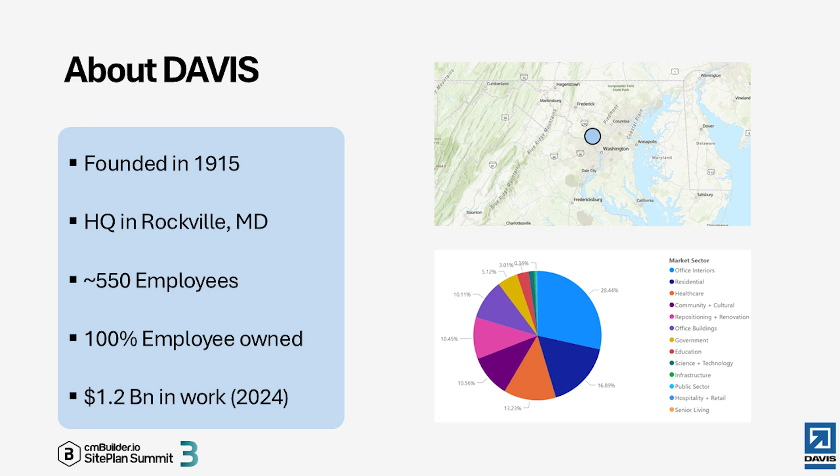So we have a lot of projects in DC and Maryland, and now we're expanding to Philly and Charlotte, North Carolina. We have about 550 employees. It's 100% employee-owned, and we were doing about $1.2 billion of work. We have a couple different markets. We work a lot in residential offices. We're expanding into critical environments such as labs and data centers.

And a little bit about myself. So I'm based in Rockville now. I am originally from New Jersey. I studied construction engineering and management at Virginia Tech, graduated last year, and so I started with Davis about a year ago, and I've been working in cmBuilder for most of that time. Most of my experience previously was in 3D modeling and CAD, and so it's been interesting to pick up the simulation and CAD side of construction.

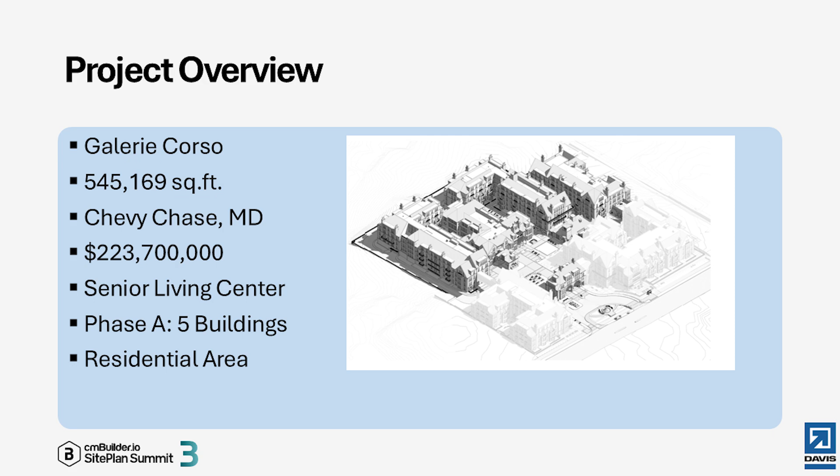So a little bit about the project. The Galerie Corso project is 545,000 square feet, an elder care senior living center in Chevy Chase, Maryland, about a $223 million project. In phase A, which I'll be showing you today, there's 5 buildings. It's in a residential area, so we're trying to be cognizant of the surrounding citizens and mitigating dust and other pollutants.

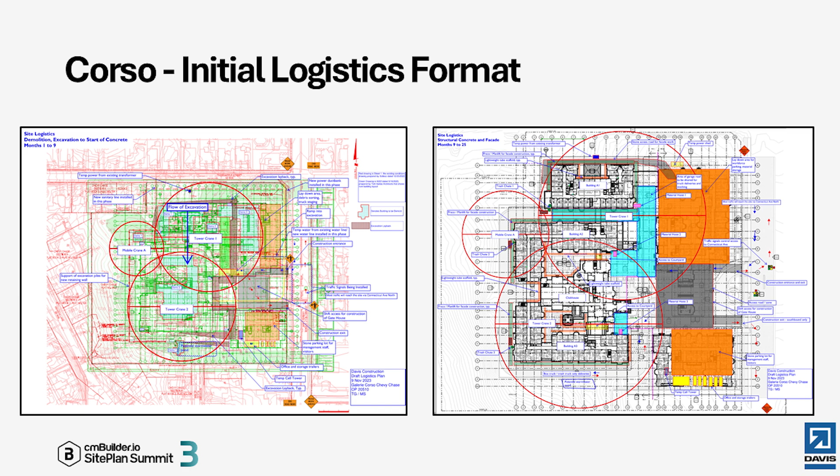So this is the mess that came to my desk when I first started this project. A lot of the time you'll find people who are focused on just their specific task are not really thinking about formatting information in a way that's able to convey. And so my job has always been, how do I bring your ideas from your head to the 3D model? With this really congested plan they gave me, I had to do a little bit of diving through the plans, discussing with people, and picking their brains about what they really wanted to execute, because we can't bring this into a proposal, and that's where cmBuilder steps in.

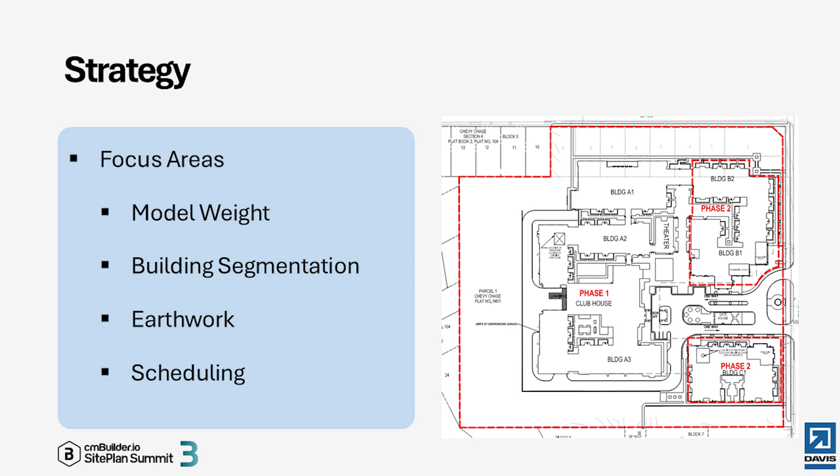So we have 2 phases. In phase 1, we're building 5 different buildings, and the model was submitted as one large Revit file, about 2 gigabytes. A large part of my approach was, how do I split the model up and make it lightweight enough for cmBuilder, so that the simulation will flow smoothly. Another part is that there's a very large site, so earthwork was a very large consideration. All the different excavations and initial terrain data was very important for the QTO aspect of this project. This is all important information for the estimate.

And the other most critical part is the scheduling. We're going to be working on multiple zones at the same time, so breaking the model out so that we could show that schedule and bring everything in was a very big focus for me. We were given a P6 schedule, and we were able to import all of our milestones. But you'll see further on, there's about 120 milestones that we had to put together to show each of these individual phases coming through.

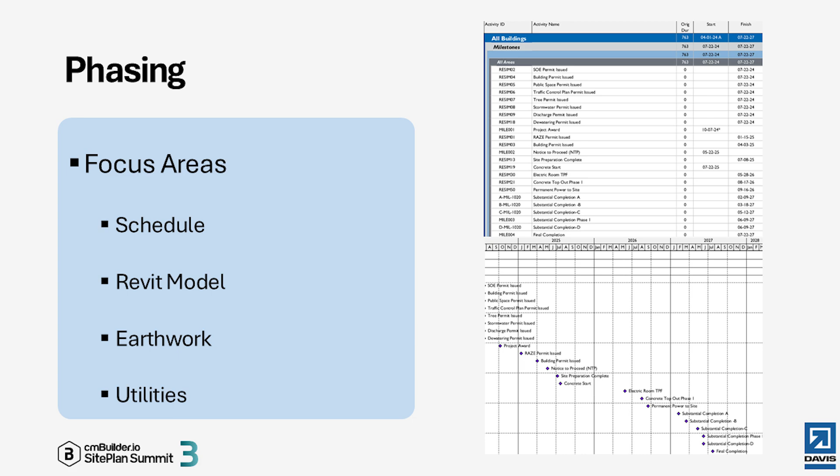Now, in the original request given to me, the owner wanted to see the progress on the project in 3-month jumps. So to show all of that data, I wanted to break it out as granular as I could and then show at a specific milestone the progress as I came through. It was really important for me to dive into the schedule, break down when one zone was being worked on versus another, and bring all of that information in through the milestones.

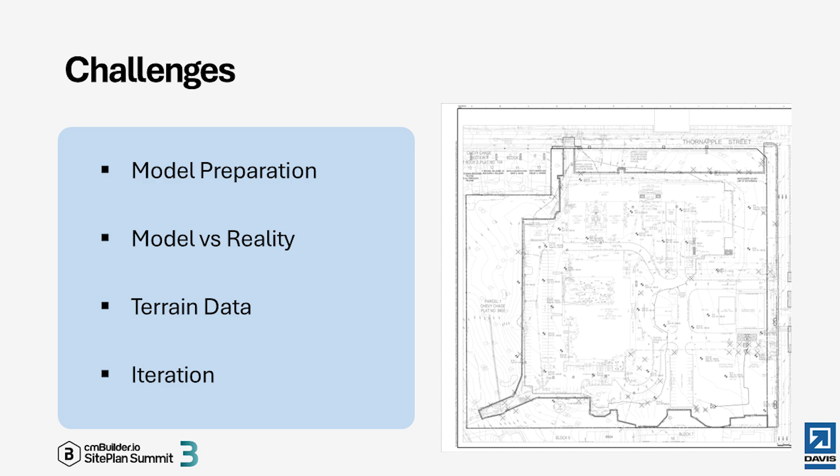One of the challenges I had was I had to prepare the model not only from the Revit standpoint, but also the initial surroundings. I was bringing in civil drawings to use the contour lines and the custom terrain in cmBuilder to have accurate terrain and topography, so our calculations would be correct as we do our QTO.

And so a really important factor for me was, what is the difference between the model versus the reality? And I want to bring my model as close to reality as possible. We don't want to show things that are unrealistic, and it all serves to produce a better logistics plan overall.

But another important thing with this is that I had to iterate on that design. And so there were a lot of things that I didn't know specifically about construction when I came into the job. And so when I initially started on this project, maybe 9 months ago, there were a lot of questions that I had that were unanswered. And as I went through, people reviewed the slides, gave feedback, and I was able to make more accurate updates so that we could align the model with reality.

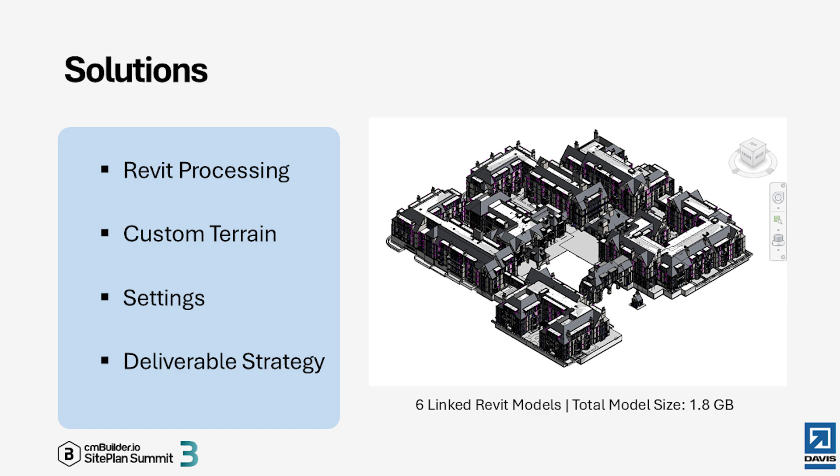And so this is what the Revit model looked like. It had 6 linked Revit models within it. It's about 1.8 gigabytes. And so a big portion for me was, how do I prep my Revit model so that it's lightweight enough for cmBuilder, but also showing the great depth of information that's here. The designers put a great amount of work into it, and it looks very nice.

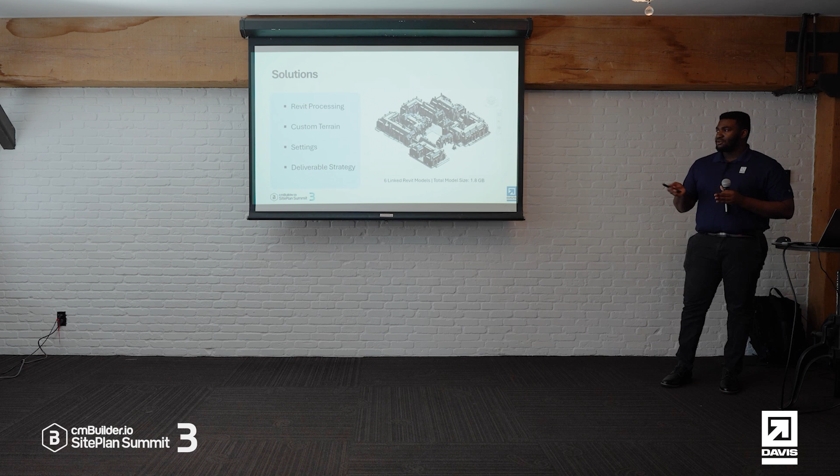And so a big part for me was removing all these superfluous things, the things on the inside that we don't really need to see. It included all the MEP, all the fixtures, all the important things, but that's all not really needed for the purposes of our presentation. And so reducing this model down to structure and architecture was a really big part for me, but part of the problem was the entire site has a continuous slab, and they didn't break it out nicely for each building to have its own structure or own separate layers.

So a big portion for me was selecting certain portions of the model, exporting that either as an IFC or as a separate Revit file, and bringing that into my cmBuilder scenario so I'd be able to work with it more quickly. Another part as well was the settings, right? We want to make sure that it's rich, but it's not too heavy.

And also, it was important for me to think about, what was my deliverable strategy going to look like? What are they actually trying to see? Are they trying to see the progress of the structure so they can communicate with their team in real time, or are they just trying to see how long is it going to take practically for us to get people into this building?

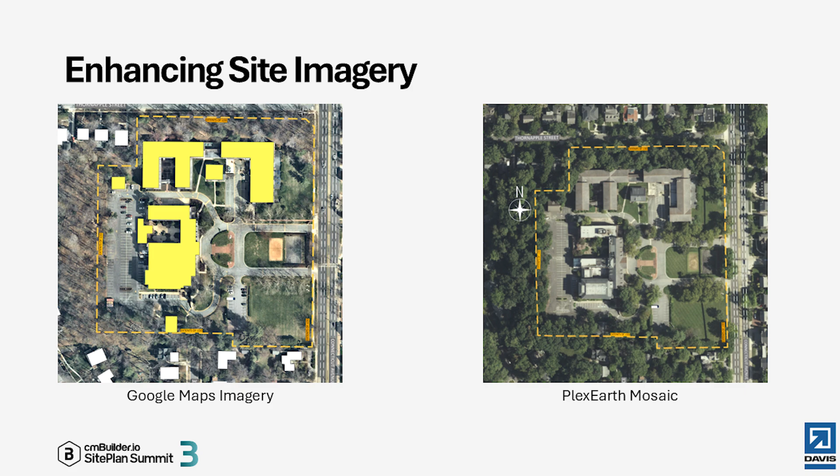And so a couple of different strategies we employed to enhance the general site imagery. The initial imagery was a little bit out of season for what the owner wanted to show, and so we used a tool called PlexEarth. This would bring in some more refined Google Maps imagery and create a mosaic around the site, and so we can see a little bit more high-res imagery at a specific time of year.

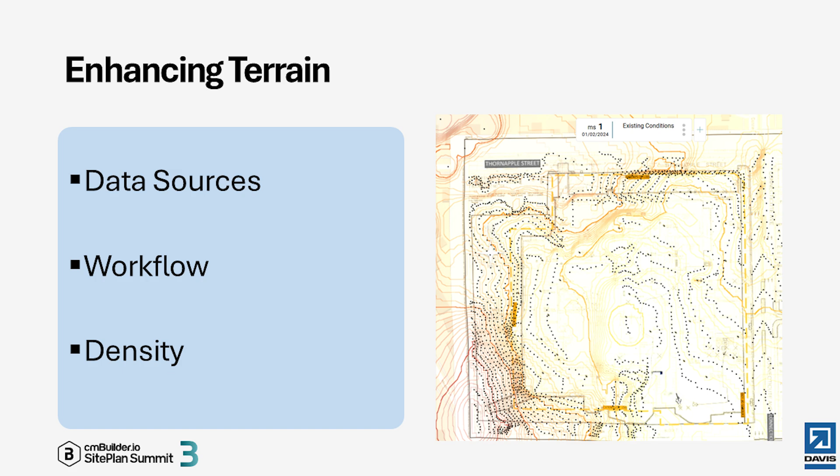In addition, the topography that I brought in from the civil plan, I manually placed all these points. I've now learned you don't need that many points to get the message across, but it was a very important thing for me to see practically what my site looks like, because the initial terrain data, while it's helpful to get a basis, it really matters what the use case is for your project. And so for us, QTO was a big factor, and we wanted to make sure that that made sense.

And so overall, I brought my civil drawing in, projected it onto the terrain, and started placing my points along those contour lines as I saw fit. You can see a very dense area there on the west side of the site, but overall it slopes from the top to the northeast to the southwest.

And so I'll start now the simulation. Oh, excuse me.

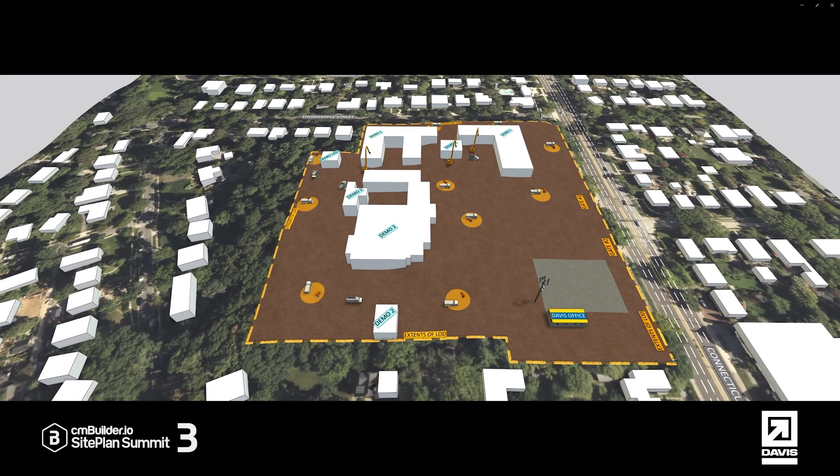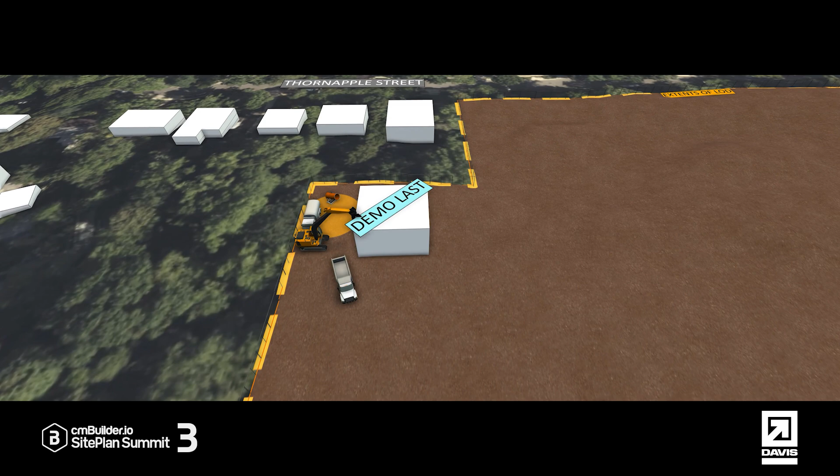Okay, very good. So you can see we're nested within a neighborhood here. We have a main road on the east side of the site here. The first phase was the demolition of a couple existing buildings. So we go through here with a couple dust suppression systems, breaking down the buildings, doing abatement inside the buildings, and so on. And then we start working on our mobilization in phase A.

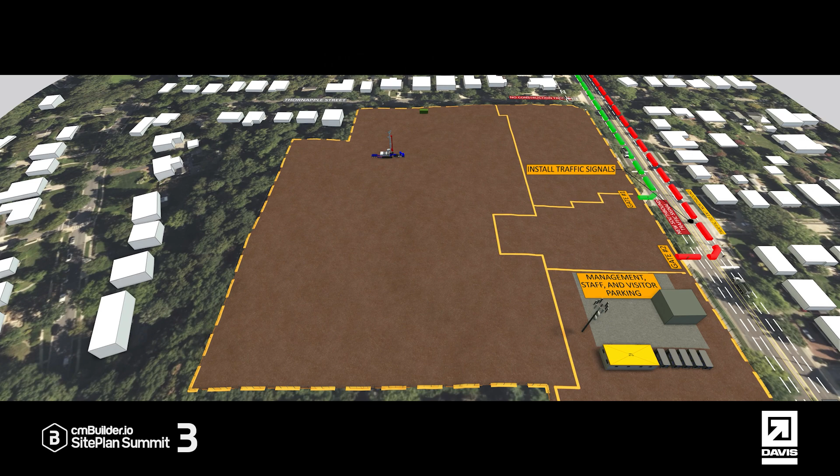And so here, we're preparing to do the support of excavation on the west side of the site. And so as we continue down to the south, we start preparing our earthwork in the north side of the site. And so we continue on installing utilities, and we start here with our slab on grade. And so this is a really big site. We have an entire building sitting on top of a garage deck combined under all the buildings.

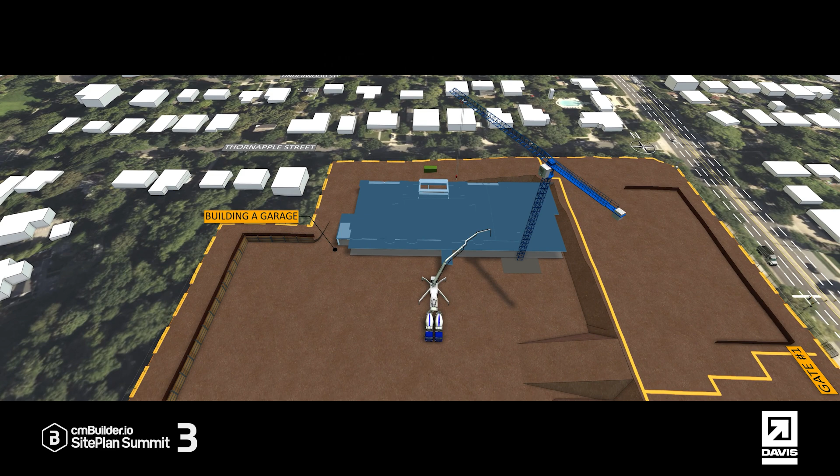And so we're working on different segments of the project at the same time. And so as you'll see structure coming up, you'll see structure coming up on a further segment in the south of the site. And so by the time we're at level 2 here, we're working on the slab on grade for building C and D.

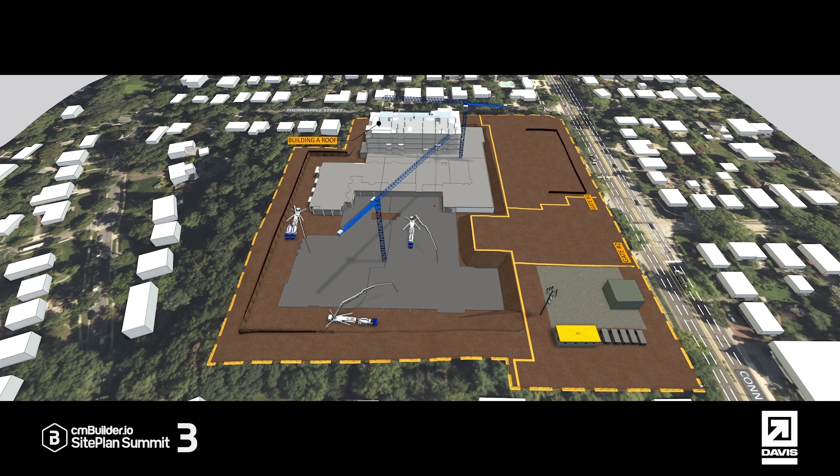And so you'll see as well that we have 2 tower cranes. We're planning to bring mechanical equipment in on the east side of the site. And it was a very important part of our design to pick a crane that was large enough and capable enough to pick across different areas of the site.

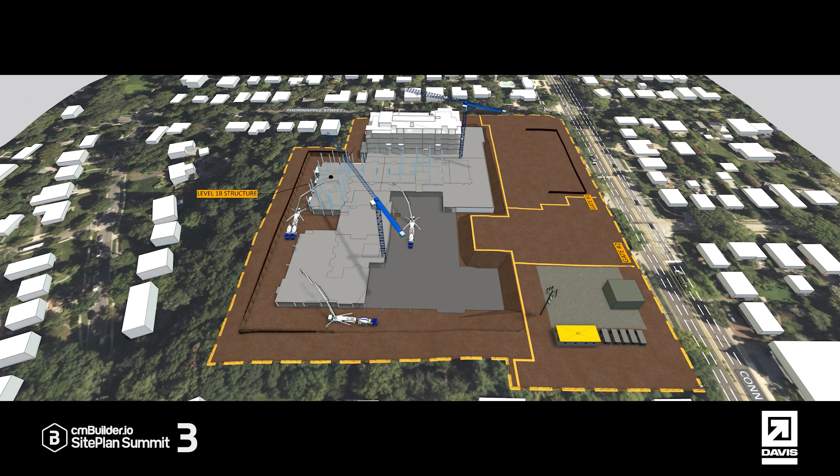And so here we're looking at building A as its structure is almost complete. Continuing on now to the remainder of the south side of the site, working on building B and C. One thing that I would say is a lesson learned here, the initial Revit model had no breaks for the columns, and so if I was to do this again, I might export it as an IFC and split the columns by level so that I could have my layers properly.

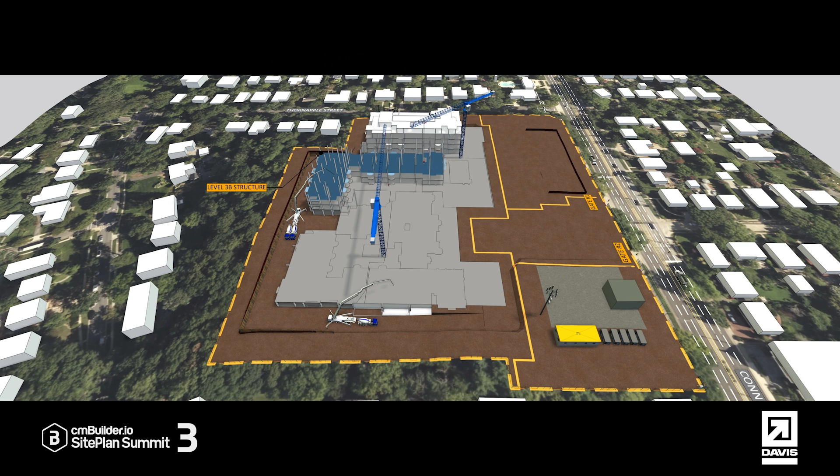But a big component of this project was it was handed to me after an initial version was already released. So my boss about a year ago worked on this project and put an initial version out. And so when I first came in, I tried to do as much as I could building off of what he had, not trying to reinvent the wheel. But I found that when I was preparing for this summit, it was better to start from scratch. And knowing when to start again and reiterate on the initial intention is very important for me.

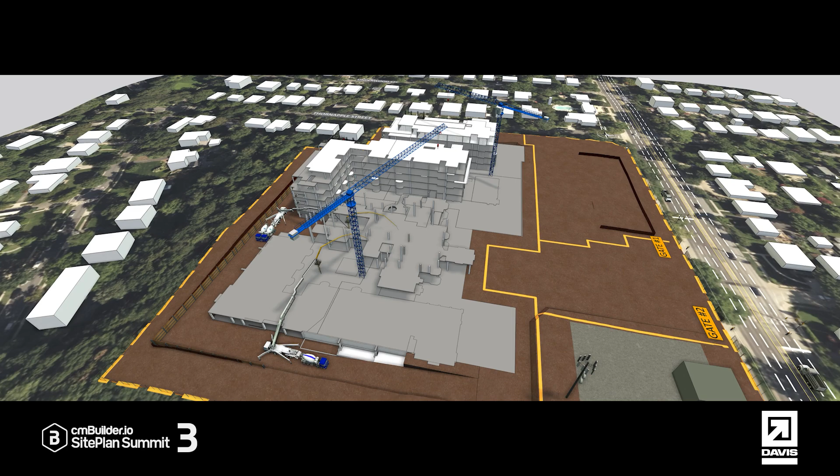And so as we continue now building the rest of the structure, you can see building B is now complete and we're working on the clubhouse at building C here. And you can also see, it's a little bit difficult to see, but the wall frame is also coming up. And so these are all important details that were given to me in the schedule, things that our field team wanted to know about. And so overall, we wanted to be able to communicate with both the community at large and with our team internally.

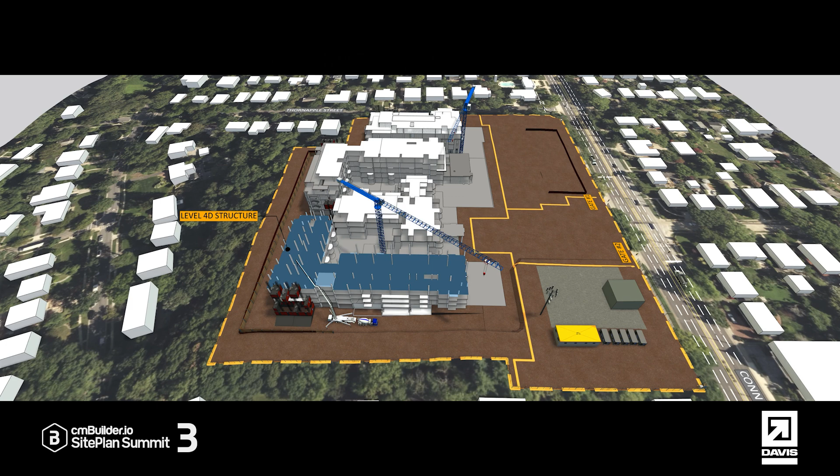Part of the request was that the county wanted to share this presentation with the surrounding neighborhood so they would know practically what does it look like, how much disruption is there going to be in my day-to-day life, and what are you doing to mitigate that disruption. So we're continuing on with the remainder of construction in the south here, almost done with the structure on building D, and building C is just about complete here.

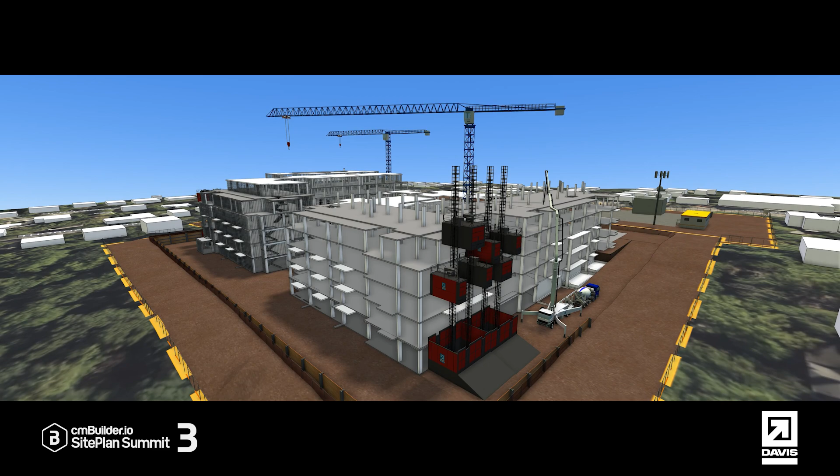You'll see in a few moments the trucks coming in to align with the crane and allow the mechanical equipment to be prepared on the roof. This is a really big lift. This whole project has a lot of moving parts, and it was really important for me as well to pass this information on to the safety team so they could start preparing where to place equipment, evacuation plans, and we'll go into a little bit more detail later about other ways Davis is using this technology to share that information.

And so we'll continue on here, finishing out the remainder of the structure on building D. There's some work going on the insides here in terms of structure. You'll see the pick here for the mechanical equipment. And so now we start getting to do facade on the building in the north. So as we're finishing up wall framing on the south building, we're finishing up architecture on the north side.

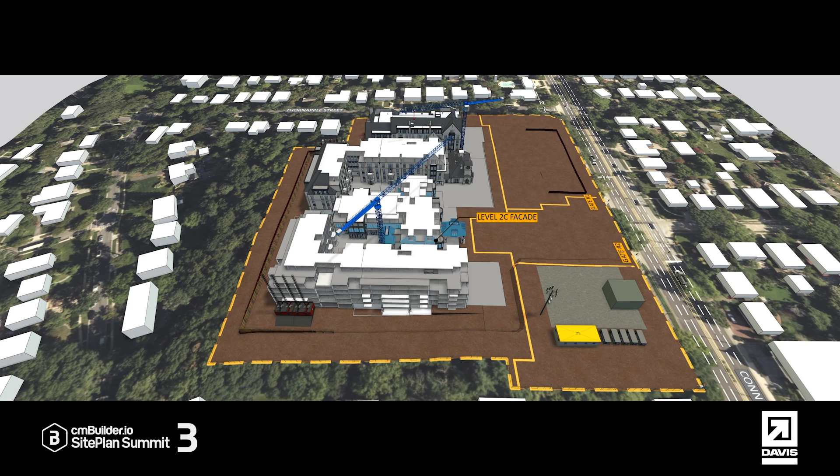And at this phase in the project, they're planning to have some level of material laid down either within the structure or underneath in the garage. And so sorting out the logistics of that was not fully fleshed out by the time I got to make this presentation. And so this was really a facilitator for the discussion. These models have been really important for taking it into a meeting with people who maybe are not so technical but bring a wealth of construction knowledge so they can see practically, yeah, that doesn't quite look right. What can we do about making this look more realistic or more feasible?

And so as the remainder of the facade comes up on building B, we'll finish up building C now, and we're starting to work to close in the remainder of building D here. So there's really a lot that went into putting this model together. It was a lot of getting my camera in just the right angle, selecting a certain part of the model, and making sure it aligned with a milestone. And that required a lot of back and forth in terms of testing, making sure it looked correct. And I think a big portion of that was due to the way the Revit model was structured.

We can't always control the inputs, but what we can do is make it work with what we have. And so not being able to use the object tree was one of the challenges that we faced here. And so I was able to kind of maneuver around that by working on selection, temporarily hiding objects, and making sure I'm seeing exactly what I want to see.

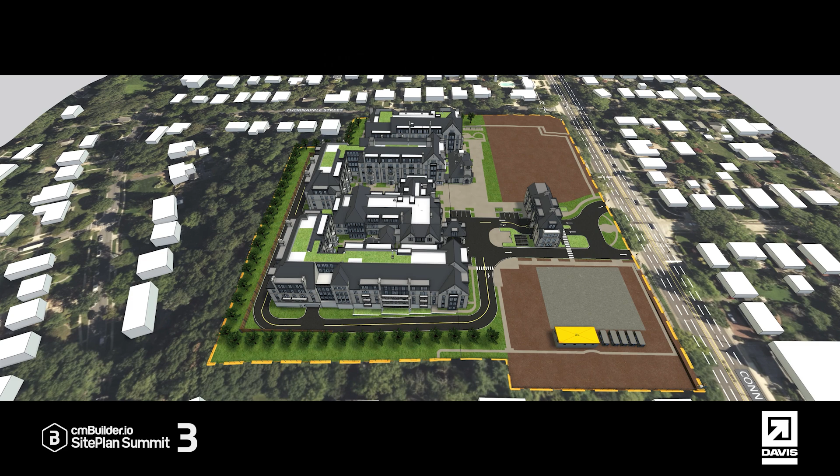And so by the end of the simulation, now we have all of our hardscape and landscape. And so all of our buildings are now complete. We have a theater, gatehouse, clubhouse. And overall, this was a really heavy lift. But over the span of maybe 2 or 3 weeks, I was able to put it together. But this was largely an independent project.

And so for me, it was really important to communicate early and often about getting feedback. What are the things that you're looking for specifically in this project? Who's the end audience, right? Who are we building this for? And so this was all really important information that we wanted to pass along to the county. And it was a really great experience to learn about the intricacies of cmBuilder.

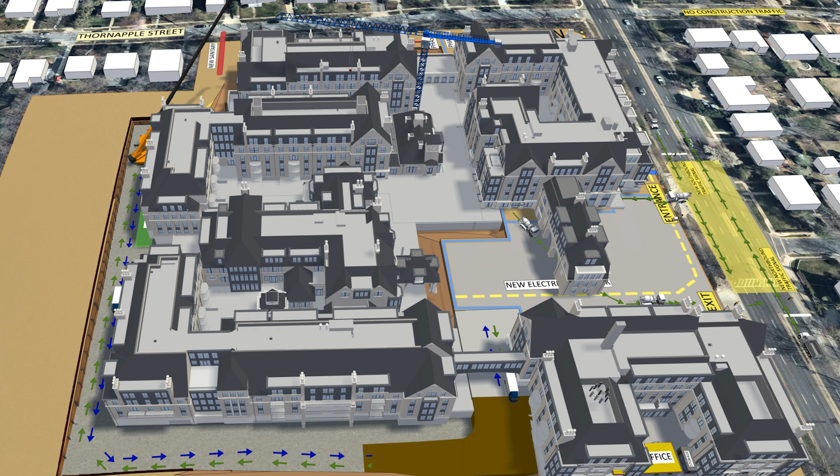So some of my lessons learned, right? Know your audience. This first presentation that was provided by my boss here was sufficient for the time, but overall visually it left something to be desired. And so I took that as a main component for me. I wanted to make sure that it was visually pleasing, cohesive in terms of color and style.

And so largely at Davis, I've been responsible for establishing those standards, and I tried to pull out all the stops and make sure that this presentation was an example of what we can do on the high end at Davis. And so the other part of preparing my model was segmenting it, right? Understanding that it's a big lift, and so you have to break it down into steps that are workable, otherwise it ends up getting overwhelming.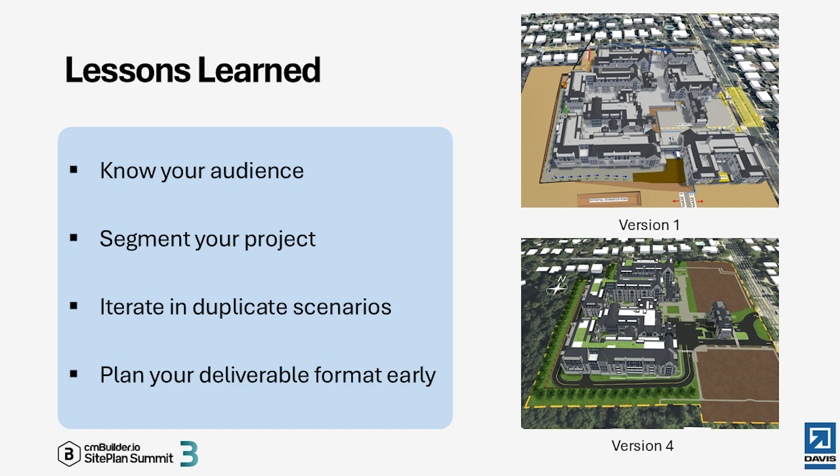So another big portion of this is that I iterated in different scenarios. So my first model, the model I had provided by my boss, wasn't useful. So I made a second version, a third version, and then finally one that had all of the scheduling information fully included. But the original request was to have milestones and 3-month jumps. So it was very helpful to be able to duplicate, build on top of what I already had.

And then a really important thing for me was planning my deliverable format. Are they asking for images? Are they asking for a video? Do they want to be able to fly around? These are all important things, because if you have little blemishes in your model, you don't want to give anybody ammunition. You don't want them to say, well, this looks wrong. I don't think you guys are thinking the whole project through. And so it's really important context to know when you're starting your project.

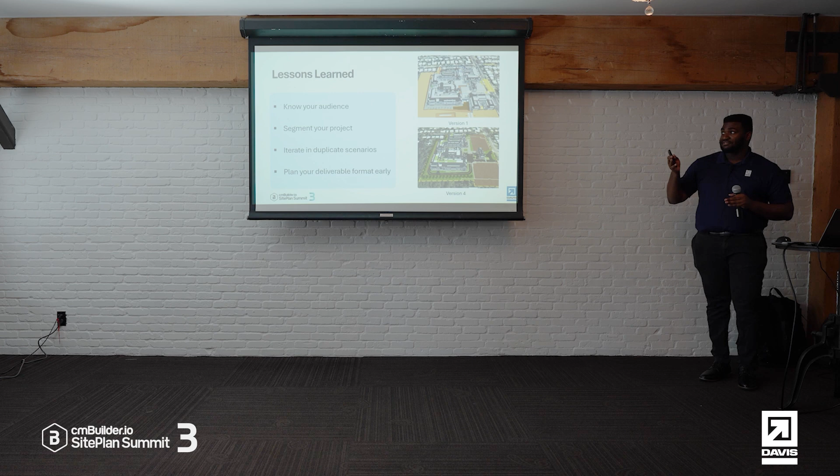And so for me, I knew that I was going to have to share this presentation with the county, and wanted to make sure that this was presentable enough for everybody to see the full vision that Davis had for the project.

Another use case that we have for cmBuilder at Davis is structural planning. So this was a recent project that we won. A big focus for them was, how do we demo this existing building and build a support structure within it, while the demo is still going on.

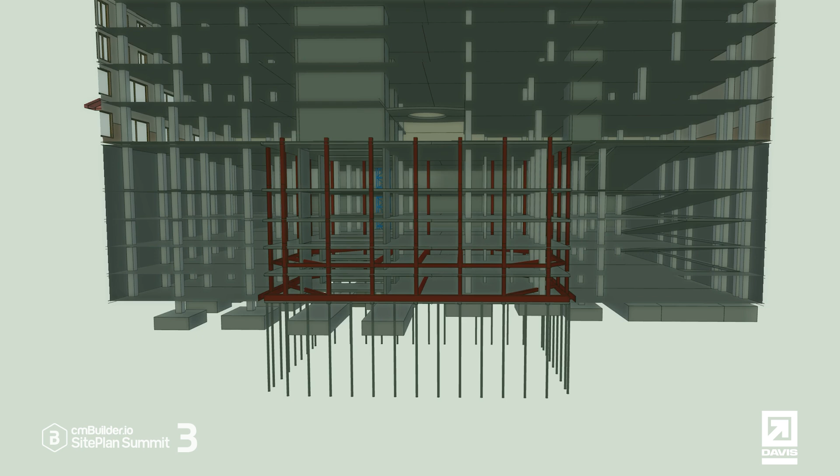And so the plan that was proposed to me: how can we shimmy steel beams in and put our piles in, in order to save schedule time, build the structure for the new building, while also saving money and enabling crews to work simultaneously. And so a big part of us winning this job was showing our intent, working with the structural engineers and communicating their intent. And so there were about 3 or 4 different iterations of this structural plan.

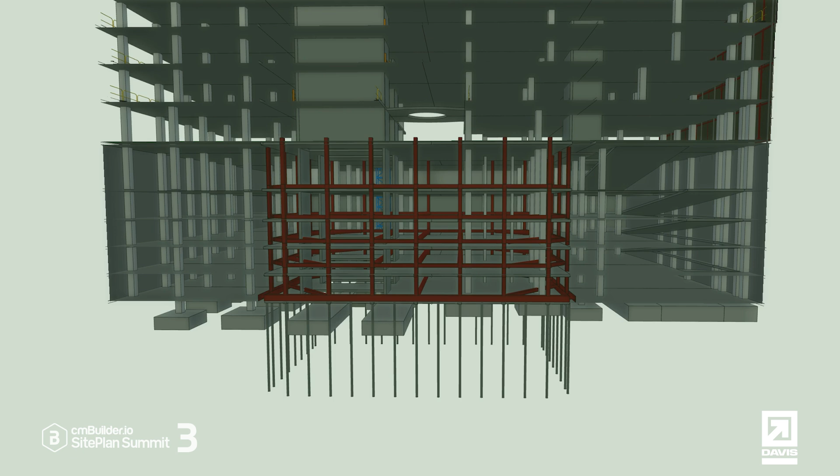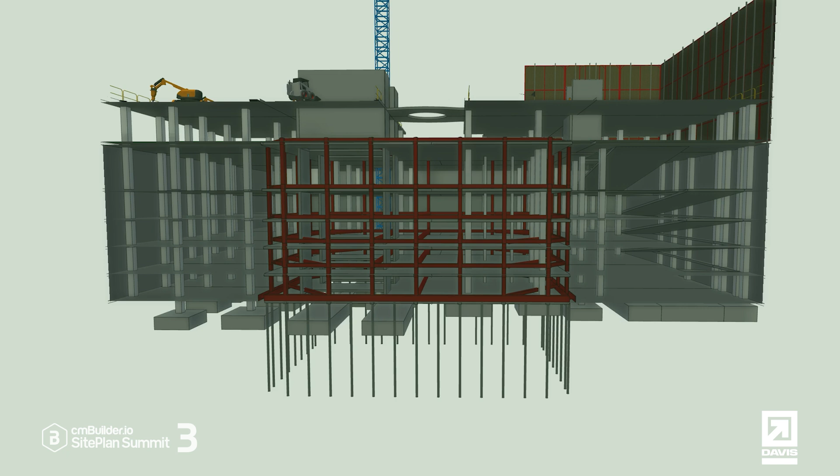But overall, our plan was to cut holes in the slab, slide steel in with a chain lift, and allow the structure to come down while the remainder of the support structure is coming up through the garage level. So this is a 15-floor building being built next to a hotel. And so being able to not disrupt the surrounding area for too long was a very important piece of this project as well. And so you'll see that by the time the building demos down to level 2, our support steel is already ready, and the rest of the building can go on as planned.

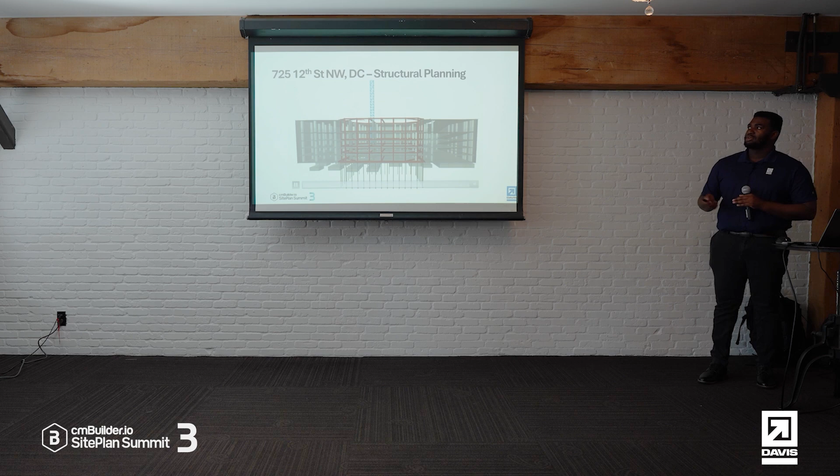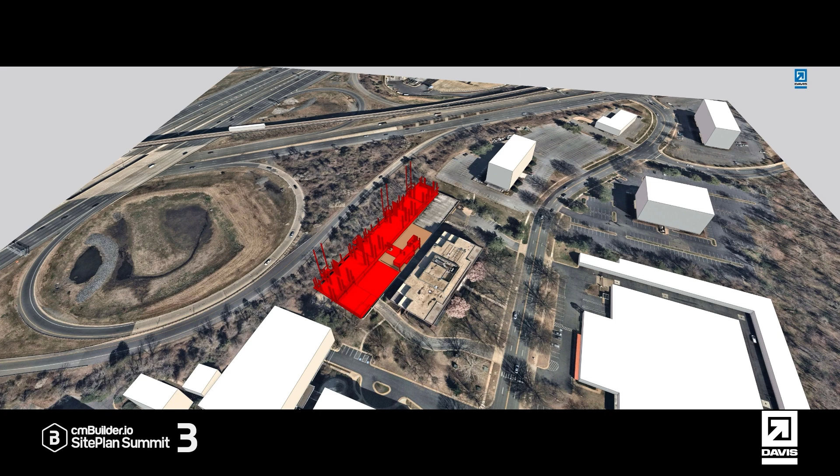Another use case that we have was for our scheduling. We wanted to communicate our pour dates with a team on a very large project, and the language barrier was a very important part of the project team. They wanted to be able to communicate with the teams pouring concrete, but wanted to do it in a visual format. And so for me, I took that challenge and decided it'd be a good format to color code.

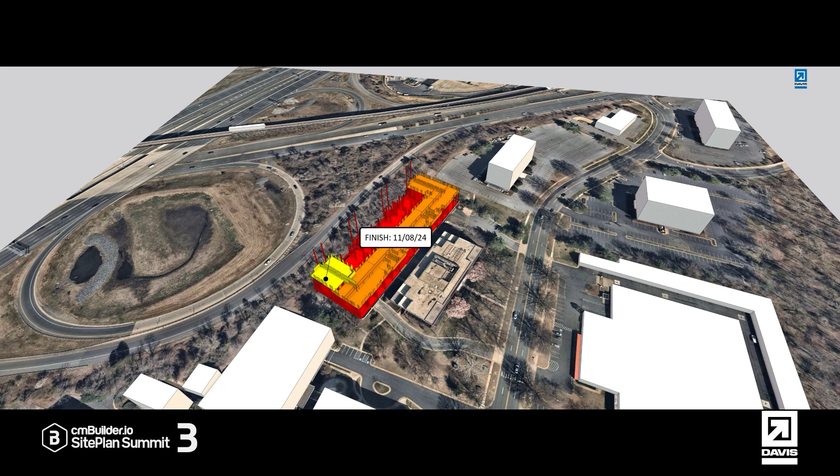The building, we have 2 phases here, about 8 stories. And so communicating what areas were being worked on when, and what level you were working on was very important. So we started with red on level 1, orange on level 2, and so on as we go through the rainbow here. And so in the spirit of Pride Month, it's very rainbow, very flamboyant, but I think it gets the message across that we have all of the information in a visual format.

You don't really need to explain to somebody in the same language what you're seeing here. And so this was a really important resource for the team, something you can put on a QR code and just hang up somewhere in the office so that everybody can know. And this is something I want to expand into further on other projects. We've used color coding on other projects for facade progress, for example, and that's something that we've had a lot of owners request of us now.

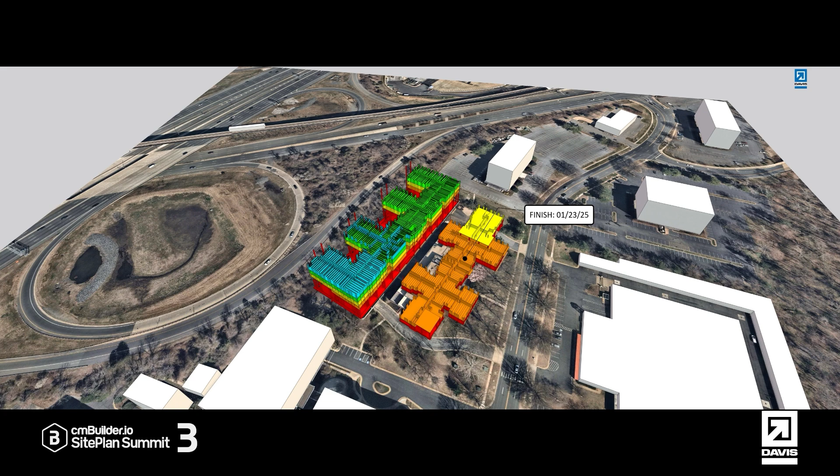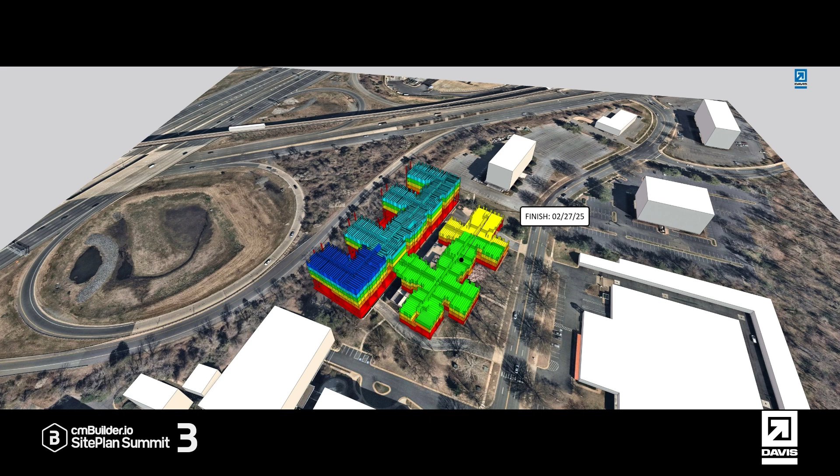And so the importance of communication as a visual medium, something that cmBuilder does really well at. And for us, it's been instrumental in terms of communicating and breaking those barriers. A picture speaks 1,000 words, and that couldn't be more true within cmBuilder. And so there's not a whole lot really going on, but we continue up through the remainder of the building here with structure going up in phase A and phase B here. And so this project is still ongoing.

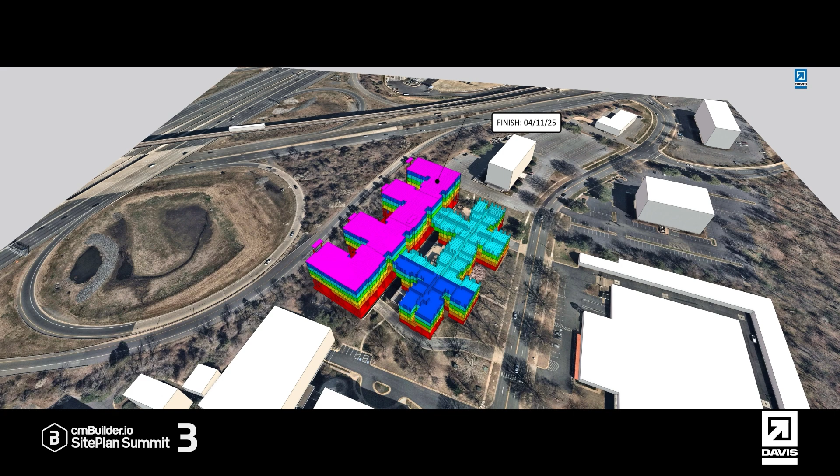It's a Hambro structural system, so they are experiencing a lot of challenges in terms of shifting things around, making sure that all of your systems can fit into the space, and making sure your cores and sleeves are not interfering with the structure. And so having an initial resource to communicate some of that information here was very important for them.

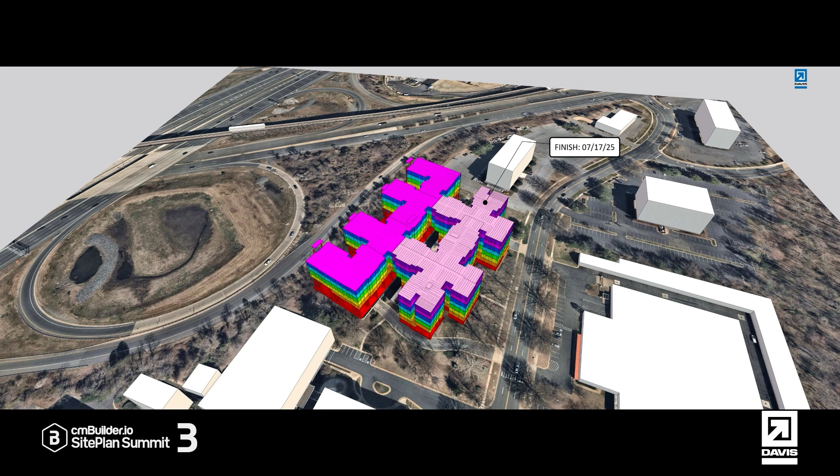So the remainder of the presentation is really just showing the completion of that schedule. But it was a very, very big project, and so showing that information in a visual medium was fairly important for us. It didn't take too long to put together. A similar process in terms of selection visually of the objects from the Revit model, but we have a very dense model, and so it's very helpful to have all of that information and present it in a usable format.

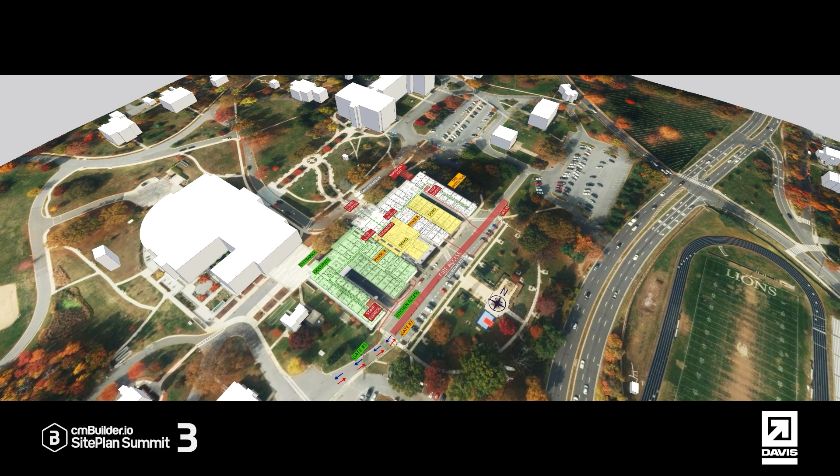Another use case was interiors. So for this project here, it is a retirement home for the armed forces, and so in this facility there's those who are differently abled, unable to walk, and so access to elevators was a very important part of the safety plan. And so while we're working on construction in the east part of the building, we want to be cognizant that the west part of the building is occupied, and so how are we going to be able to maintain access? Where's the fire protection? And how do we enable emergency services to make their way into the site?

And so what we did here is we used the basic massing in our 2D plan, and we just kind of shifted that so it lays just on top. And so we can show visually, without having a detailed Revit model, all the different information. And so we've done a couple different projects like this that I wasn't able to show you, but we had some secure spaces, so different wall types, different security zones. Visualizing that information can be done really simply by just using your 2D plans and basic massing. And I'm sure cmBuilder is going to come out with more advancements in the interior space as we go on. But this is what we've been able to work with so far within the existing tools.

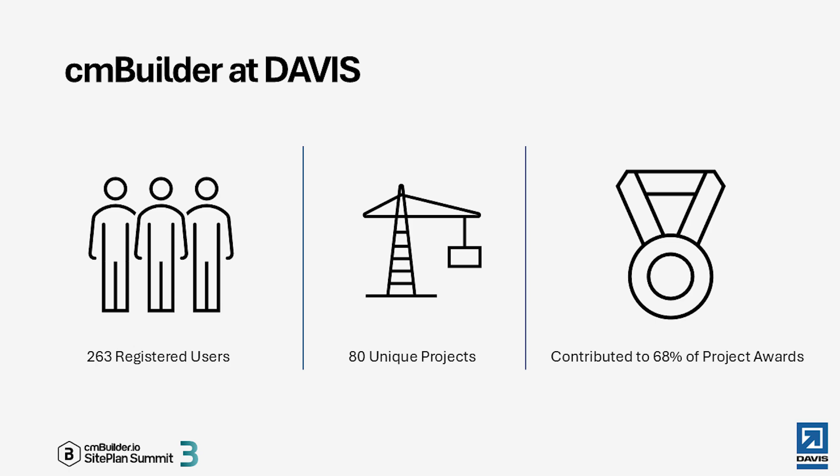And so a little bit about cmBuilder at Davis. So we have about 263 registered users, 80 unique projects, and of those 80 projects, 68% of them were project awards. So it was very helpful for us to visually present all of this information, and it has tangibly supported our progress. And this is really the way forward for logistics. It's a new era, right? We have 2D plans that show our intent, but we need to take it the next step up. Show that forward thinking, show that care and dedication to the project, and making sure that you can see it through from beginning to end.